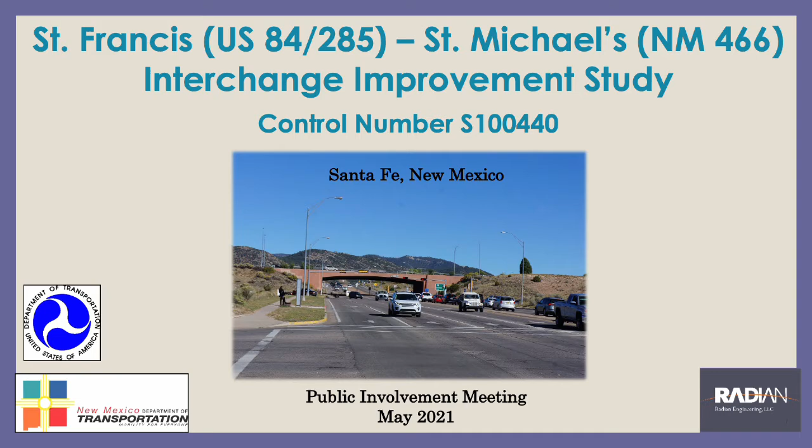Hello, and welcome to this presentation for the St. Francis-St. Michael's Interchange Improvement Study, located in Santa Fe, New Mexico. My name is Carlos Padilla. I am the Consultant Project Manager for Radian Engineering, who has been hired by the New Mexico Department of Transportation to conduct the study. This presentation is part of the public involvement program being completed for the project.

During this presentation, we will discuss the following topics. We will begin with an overview of the NMDOT study team and briefly describe the study process that will be followed. We will review the purpose and need for the project and discuss two previously completed studies that relate to the St. Francis-St. Michael's interchange and describe how the current study will build upon those earlier efforts. We will provide an overview of the study area under consideration and discuss a number of existing conditions and key project issues to be evaluated under the current study.

Next, we will review the findings of the Phase A study, which included a screening of the initial alternatives that were identified as potential improvement concepts for the project and recommended the most favorable alternatives to be advanced for further evaluation under the current study. Our team's environmental lead will discuss the environmental investigations and analysis that will be completed as part of the study, and he will provide information as to how you as members of the public can provide your input on the project and the alternatives under consideration. We will conclude the presentation with the next steps for the project development process and the time frame for completion of the Phase B study.

Our study team is being led by the New Mexico Department of Transportation. Mr. Javier Martinez, Assistant District Engineer, will be representing the District 5 office. Mr. Esteban Gonzalez is the Project Development Engineer from the North Region Design Office, and Ms. Jennifer Mullins is representing the department's Environmental Bureau. Radian Engineering will lead the consultant team on this project. My name is Carlos Padilla. I am the Consultant Project Manager.

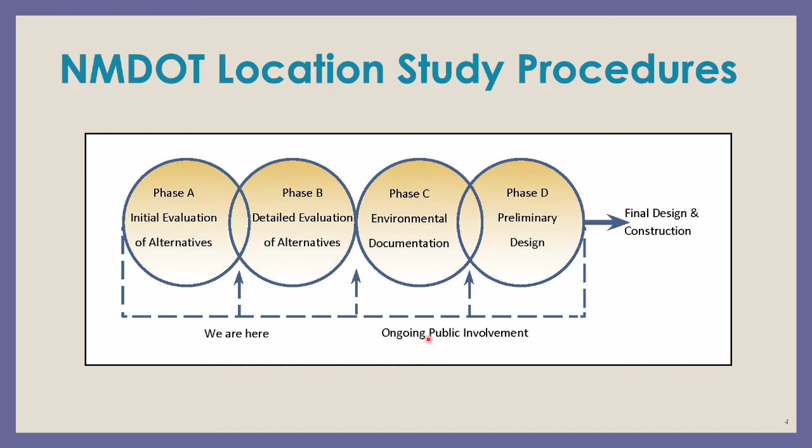The study process will follow the NMDOT location study procedures, which utilizes a phased approach to project development. We are currently in the study phase of the project. Tonight's presentation will primarily focus on analysis completed as part of the initial evaluation of alternatives and describe how that earlier work will be incorporated into the current Phase B study. Receiving public input on the work being undertaken throughout the study is an important part of the study process. The stated purpose and need for the St. Francis-St. Michael's Interchange Improvement Project is to address physical, operational, and safety deficiencies and to enhance pedestrian and bicycle connectivity throughout the interchange area.

Transportation planning efforts for the St. Francis Drive corridor began 10 years ago with a 6-mile corridor study that began at Rabbit Road, south of Interstate 25, and ended at the New Mexico 599 interchange. The 2010 study identified improvements for the St. Francis-St. Michael's interchange as the #1 priority project for the corridor. The NMDOT completed a Phase A alternative study for the interchange in 2018. The study verified the need for action and included an analysis of needed improvements. A range of potential improvement alternatives were evaluated, and those alternatives found to be inferior or unfeasible were eliminated. The Phase B study will provide additional evaluation and analysis for the remaining alternatives and will provide opportunities for public participation in the study process. A preferred alternative for the project will be selected under the Phase B study.

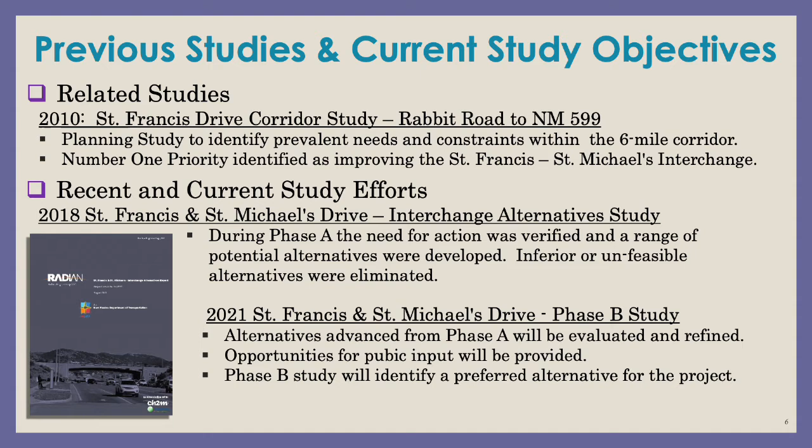St. Francis Drive, also known as US 84-285, is an important regional facility. It provides access from I-25 to the south to a number of communities located north of Santa Fe within the north-central part of the state. Both St. Francis Drive and St. Michael's Drive are important arterial roadways within the Santa Fe local transportation network.

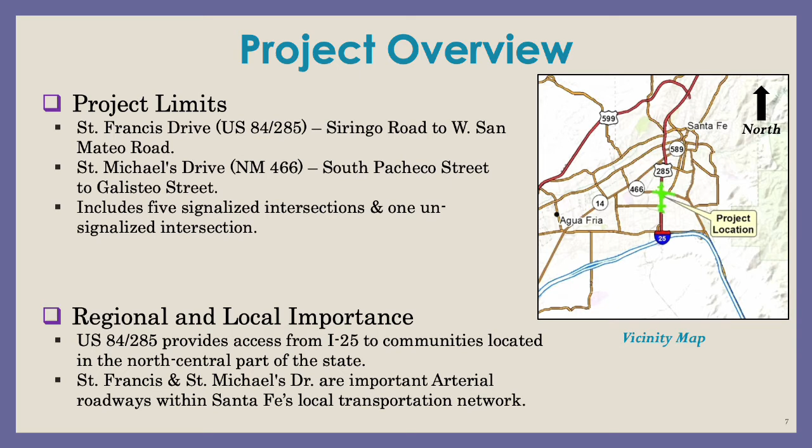Roadway features within the study area are as follows. Along St. Francis Drive, there are 3 11-foot lanes in each direction with no outside shoulders and a center median area. Along St. Michael's Drive, there are currently 6 lanes west of the southbound ramp intersection and 4 lanes east of the northbound off-ramp intersection. Within the core of the interchange, auxiliary lanes are added and dropped between ramps and intersections. The interchange is currently configured as a partial diamond on the west and as a partial clover leaf on the east.

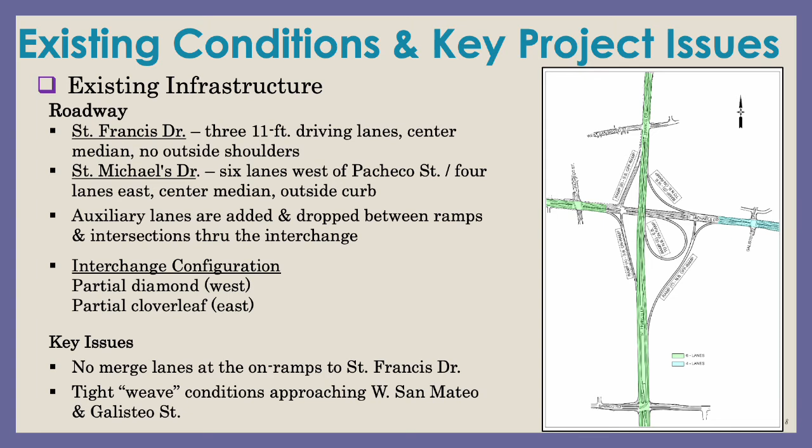Key issues include a lack of merge lanes at the 3 on-ramp locations and tight weave conditions as vehicles attempt to cross from the far outside right lane to turn left at the East Galisteo Street and West San Mateo Road intersections. The existing interchange bridge carries St. Francis Drive over St. Michael's Drive.

The bridge is 106 foot long by 92 foot wide with a 14-foot center median. The structure is comprised of a reinforced concrete box girder superstructure with full-height reinforced concrete abutments. There are a number of key issues to be considered under the current study. The existing bridge is now approaching 50 years in age. The existing bridge deck is too narrow to accommodate a merge lane from the northbound on-ramp.

A recent load rating analysis found the structure to be 43% under capacity. The bridge is classified as structurally deficient and functionally obsolete, and the structure type is not considered a good candidate for rehabilitation.

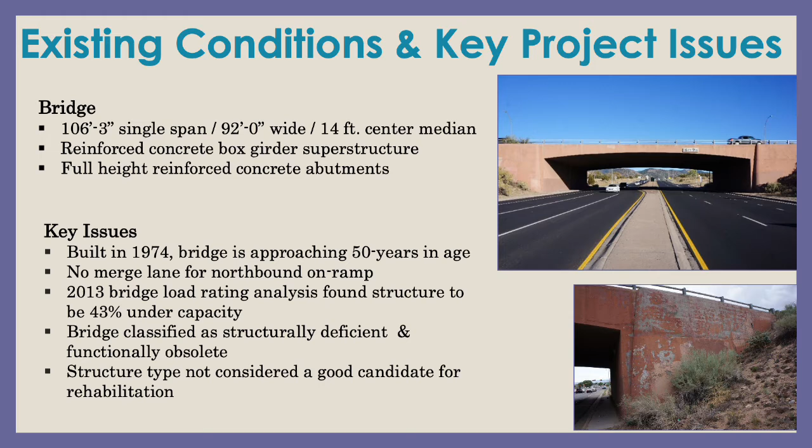Multimodal facilities. There are currently limited pedestrian and bicycle facilities within the study area. Pedestrian signals and crosswalks are found at some, but not all of the intersections. There is existing sidewalk along St. Francis Drive north of the project area and along St. Michael's Drive west of South Pacheco Street and east of Galisteo Street. There's a multi-use trail that runs along the east side of St. Francis Drive from Siringo Road to Galisteo Street that continues south and connects to the rail trail.

On-street bicycle lanes can be found on St. Michael's Drive east of Galisteo Street and at the cross-street intersections of Siringo Road and West San Mateo Road. There are 4 transit operators currently operating within the study area. They include the Santa Fe Trails bus service, the NMDOT shuttle service, the North Central Regional Transit District bus service, and the Rail Runner commuter train, which utilizes the Zia station located just south of the project area.

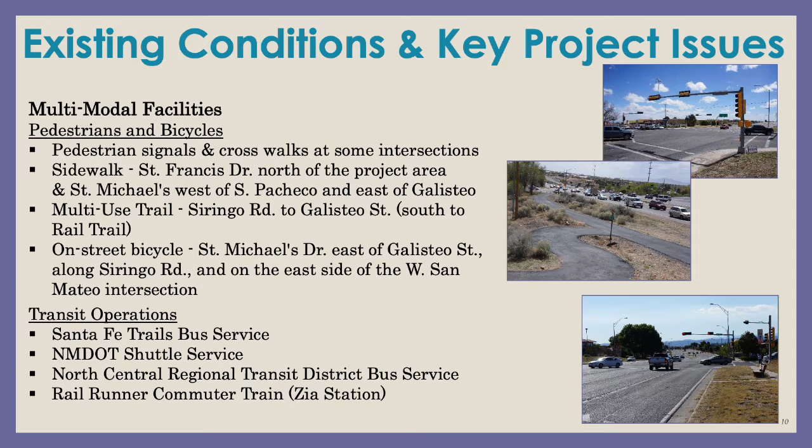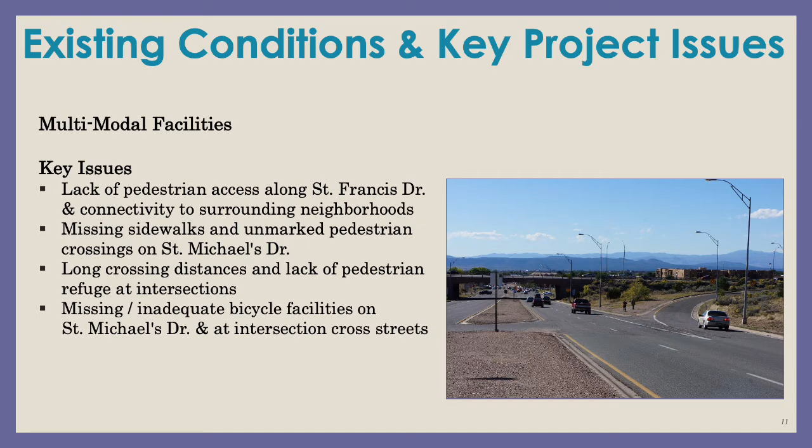Key multimodal issues to be considered under the study include a lack of pedestrian access along St. Francis Drive and connectivity to the surrounding neighborhoods, missing sidewalks and unmarked pedestrian crossings along St. Michael's Drive, long crossing distances and lack of pedestrian refuge at intersections, and missing or inadequate bicycle facilities on St. Michael's Drive and at intersection cross streets.

Traffic operations. Both St. Francis Drive and St. Michael's Drive are heavily traveled roadways. Currently, almost 45,000 vehicles per day travel along St. Francis Drive, and just over 26,000 vehicles per day travel along St. Michael's Drive. Peak hour traffic volumes at the 5 major intersections located within the study area are shown in the table. The morning peak hour occurs between 7:30 and 8:30 a.m., and the evening peak hour occurs between 4:45 and 5:45 p.m. Existing traffic counts show that intersection traffic volumes during the p.m. peak hour are slightly higher than those found during the a.m. peak hour.

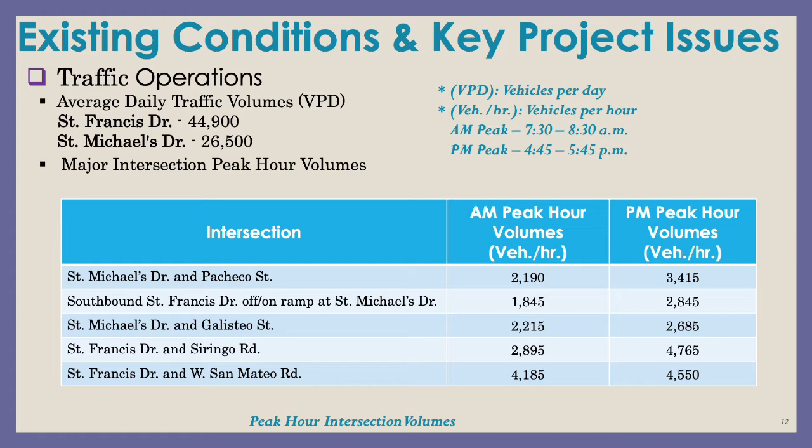Traffic operations analysis shows that all intersections currently operate without excessive delay during the a.m. peak hour, as measured by an overall level of service rating of D or better on a grading scale of A to F. However, some turn lanes at the Siringo Road and West San Mateo Road intersections lack sufficient vehicle storage, causing turning vehicles to spill over into the through lane and block the path of vehicles wishing to go straight. During the p.m. peak hour, the intersection level of service is also acceptable. However, slightly longer delays occur versus the a.m. peak hour. The Siringo Road intersection currently operates at a level of service D during the p.m. peak hour, and insufficient turn lane storage is found at all intersections.

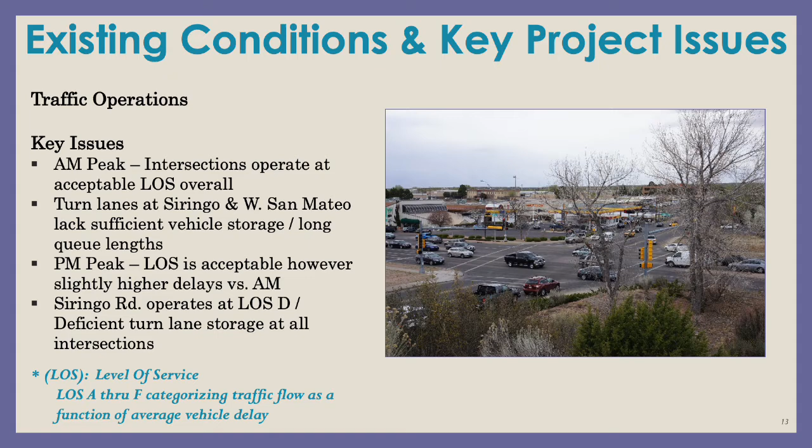Safety. A 3-year safety analysis was completed for the project. 222 total crashes were found to have occurred within the study area over the 3-year period. 82 of the crashes resulted in injury, and there were 3 pedestrian accidents, 1 resulting in a fatality. The study also identified several hotspot locations where clusters of accidents were found to have occurred within the study area. The hotspot locations were as follows.

At 2 of the on-ramp entrance locations from St. Michael's Drive onto St. Francis Drive where no merge lane exists. At the southbound on and off-ramp intersection on St. Michael's Drive. On St. Michael's Drive at the eastbound approach to the Galisteo Street intersection, and at all 4 of the outlying signalized intersections. The number and type of crashes found to have occurred at the on-ramps to St. Francis Drive were found to be directly attributable to the lack of available merge area at those locations. The figure to the right illustrates an accident cluster or hotspot at the southbound on-ramp entrance to St. Francis Drive.

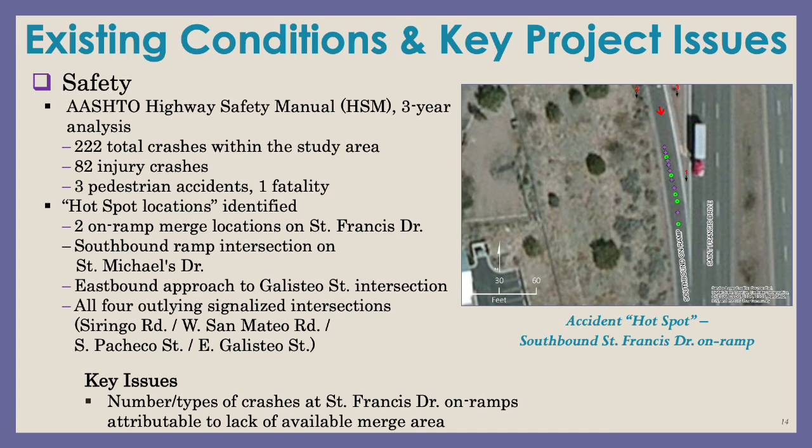We will now review the initial alternatives that were evaluated under the Phase A alternative study. 9 initial alternatives were identified. The alternatives can be grouped into 3 basic categories: 2 base alternatives, 2 at-grade intersection alternatives, and 5 interchange alternatives. The initial screening of these alternatives was based upon a comparative evaluation of how each alternative would address the underlying needs of the project. Performance criteria included addressing physical deficiencies, improving traffic operations, safety improvements, constructability and maintenance of traffic during construction, and estimated project cost.

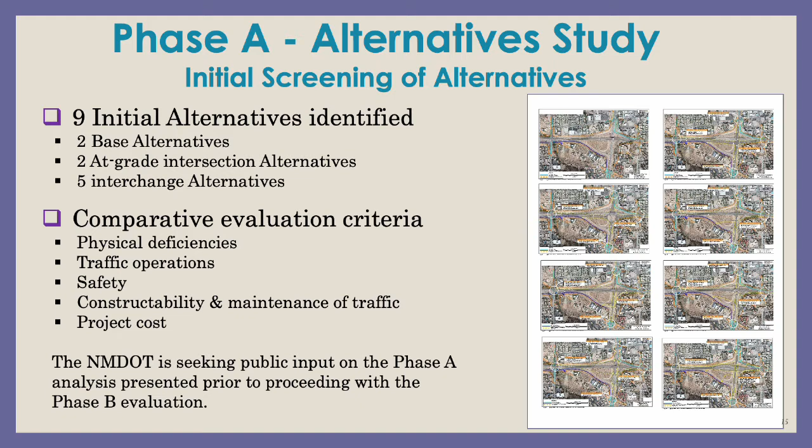A key objective of this presentation and public meeting is to obtain input from you, members of the public, on the information presented from the Phase A study prior to proceeding with the upcoming Phase B study. 2 base alternatives were considered under the Phase A study. The no-build alternative would include no improvements to the existing interchange and is maintained as a basis for comparison of

the other study alternatives. Prior to 2005, St. Francis Drive existed as a 4-lane roadway within the study area. It was restriped at that time to add an additional lane in either direction to accommodate increasing traffic volumes on St. Francis Drive. This action eliminated the outside shoulder areas and merge lanes at the 3 on-ramp entrances to St. Francis Drive.

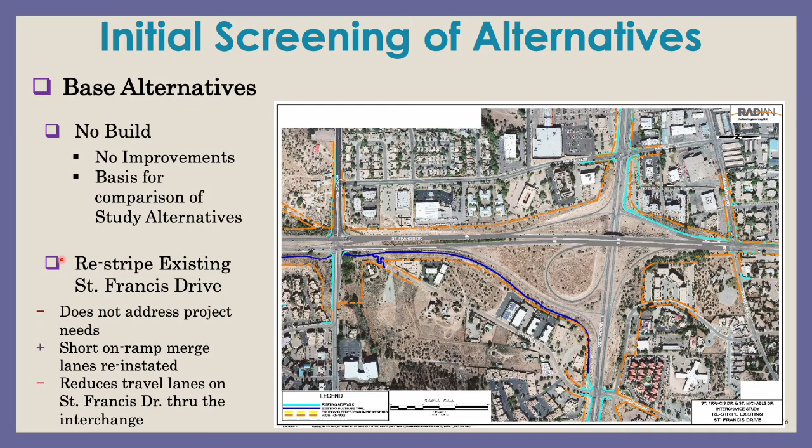Under the restripe existing St. Francis Drive alternative, the roadway would be returned to a 4-lane section, which would reestablish and improve the merge areas at the on-ramp entrances to St. Francis. This alternative would not address the project needs and would reduce the current number of travel lanes on St. Francis Drive through the interchange.

There were also 2 at-grade intersection alternatives evaluated under the study. Under the signalized intersection alternative, the existing bridge over St. Michael's Drive and all ramps within the interchange area would be removed and replaced with a single signalized at-grade intersection at St. Francis Drive and St. Michael's Drive. Under this alternative, improvements would also be made to the 4 existing outlying intersections.

The at-grade signalized intersection alternative would address the project needs, provide an at-grade alternative for comparison with the interchange alternatives, and would experience reduced impacts to traffic during construction versus several of the other alternatives. It would also have a lower project cost versus the interchange alternatives. This alternative would require a large multi-lane intersection in order to accommodate traffic passing through the intersection, and would carry with it several traffic operation and safety disadvantages as compared to some of the other alternatives.

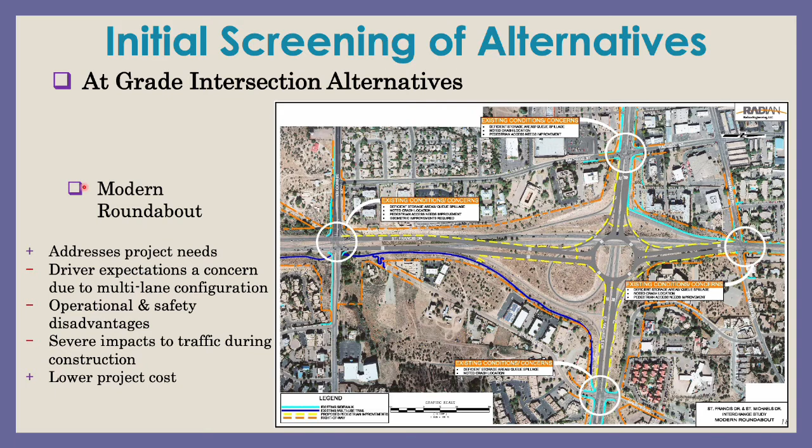Under the modern roundabout alternative, similar improvements would be made, but rather than building an at-grade signalized intersection, a modern roundabout would be constructed. This alternative would address the project needs and would have a lower project cost versus some of the other alternatives. However, it would present concerns over driver expectations in navigating through a large multi-lane roundabout, have a number of operational and safety disadvantages, and cause severe impacts to traffic during construction.

There were 5 interchange alternatives evaluated under the study. Under the diamond interchange alternative, the existing alignment along St. Francis Drive would be maintained and a new bridge built over St. Michael's Drive. The ramps on the west side of the interchange would be improved at their current location, while the ramps on the east side of the interchange would be removed and replaced with new ramps to form a diamond configuration. New auxiliary lanes would be built along southbound and northbound St. Francis Drive to accommodate traffic entering onto the main line from the new on-ramps.

All 4 of the existing outlying intersections would be improved under this alternative, as would be the case under all of the other interchange alternatives under consideration. The Diamond Interchange alternative would address the project needs and would provide for a greater range of potential benefits versus some of the other alternatives. Traffic impacts during construction would occur at an increased level versus some of the other alternatives, and the project would have a higher cost to construct.

Under the ramp reconfiguration alternative, the 2 existing on-ramps on the east side of the interchange would be removed and replaced with a single on-ramp from St. Michael's Drive. The existing northbound off-ramp and 2 ramps on the west side of the interchange would be improved at or near their current locations. New auxiliary lanes would be constructed along southbound and northbound St. Francis Drive to accommodate traffic entering onto the main line from the new on-ramps. This alternative would require a new and widened bridge over St. Michael's Drive.

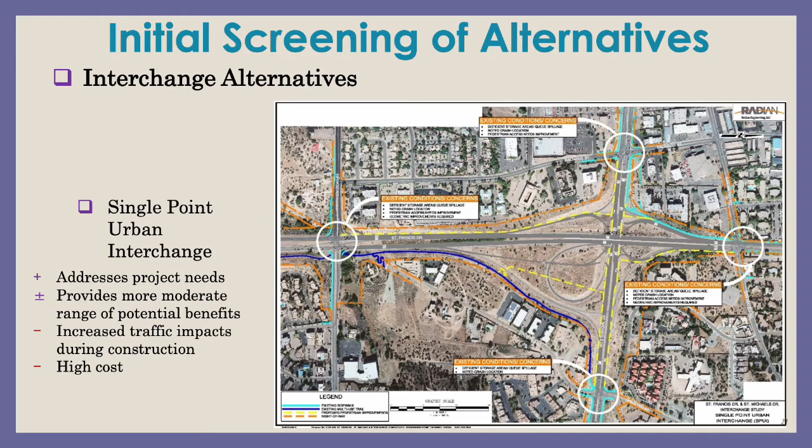Under the single-point urban interchange alternative, the entire interchange would be removed and reconstructed into a new configuration. The existing alignment of St. Francis Drive would be maintained and a new bridge over St. Michael's Drive would be constructed. The on-ramps would be reconfigured to form a single at-grade signalized intersection on St. Michael's Drive underneath the new bridge. New auxiliary lanes would be built along southbound and northbound St. Francis Drive to accommodate traffic entering onto the main line from the new on-ramps.

The single-point urban interchange alternative would address the project needs and would provide for a more moderate range of potential benefits versus some of the other alternatives. Increased levels of traffic impact would be experienced during construction, and the project would have a high cost to construct.

Under the diverging diamond interchange alternative, similar improvements would be made along St. Francis Drive, including a new bridge to be built over St. Michael's Drive. New auxiliary lanes would be built along southbound and northbound St. Francis Drive to accommodate traffic entering onto St. Francis from the new on-ramps. Along St. Michael's Drive, significant improvements would be made with non-traditional intersections being built to accommodate the new diverging diamond configuration, which eliminates left-hand turn movements at the intersections.

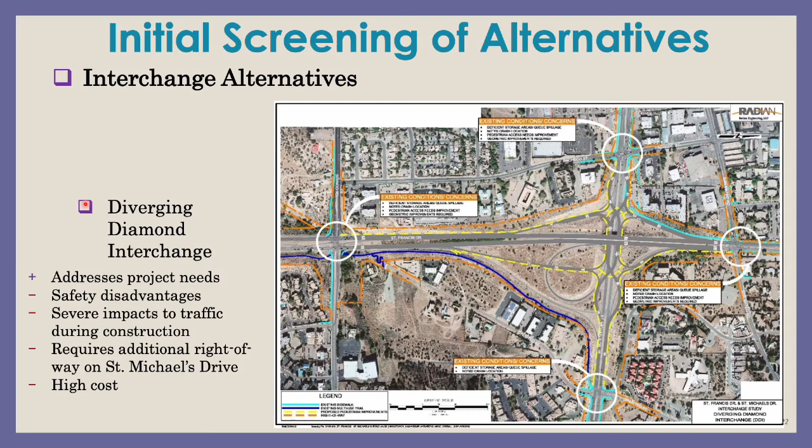The diverging diamond alternative would address the project needs, but would be expected to have several safety disadvantages as compared to some of the other alternatives. It would have severe impacts to traffic during construction and would require additional right-of-way on St. Michael's Drive, and would have a high project cost.

The final interchange alternative is the split bridge northbound-southbound left-on access alternative. Under this alternative, a portion of St. Francis Drive and the existing bridge over St. Michael's Drive would be removed and replaced with new northbound and southbound alignments on St. Francis Drive, leading to two twin new bridges to be built over St. Michael's. Under this alternative, the existing on-ramps on the west and east sides of the interchange would be removed.

Drivers wishing to access St. Francis Drive would do so from a new intersection on St. Michael's Drive located between the new bridges, and new on-ramps that would be built along the old roadway alignment. This would require vehicles entering onto St. Francis Drive to merge into the inside lane from the left-hand side. The existing southbound off-ramp would be reconstructed at its existing location, and a new northbound off-ramp would be constructed in the area of the old Cloverleaf ramp on the east side of the interchange.

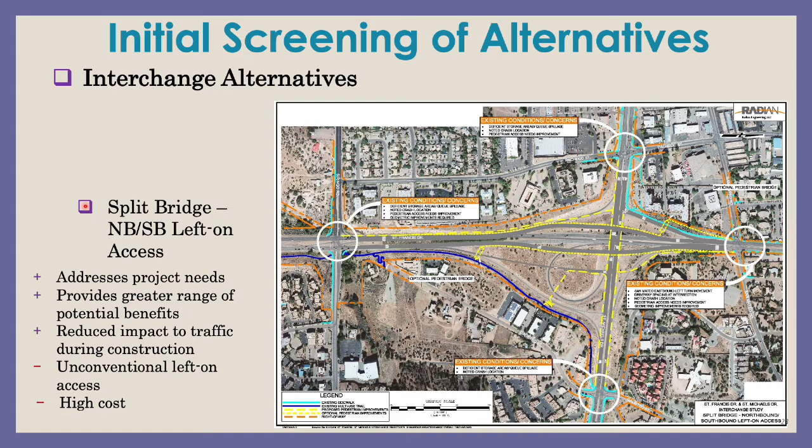The split bridge left-on access alternative would address the project needs and would provide for a greater range of potential benefits versus the other alternatives. Traffic impacts during construction would be substantially reduced as compared to the other alternatives. This alternative would utilize a non-conventional left-on access configuration under the final condition and would have a high project cost.

Through the Phase A screening analysis, the alternatives with the greatest potential for meeting the needs of the project were identified. Inferior or unfeasible alternatives were eliminated from further consideration. The alternatives eliminated from further study include restripe existing St. Francis Drive, the modern roundabout, the single-point urban interchange, and the diverging diamond interchange. Although the no-build alternative would not meet the needs of the project, it remains under consideration as a basis for comparison with the build alternatives.

In addition to the no-build alternative, the following alternatives will be advanced for further evaluation under the Phase B study: the at-grade signalized intersection, the diamond interchange, the ramp reconfiguration interchange, and the split bridge northbound-southbound left-on access interchange.

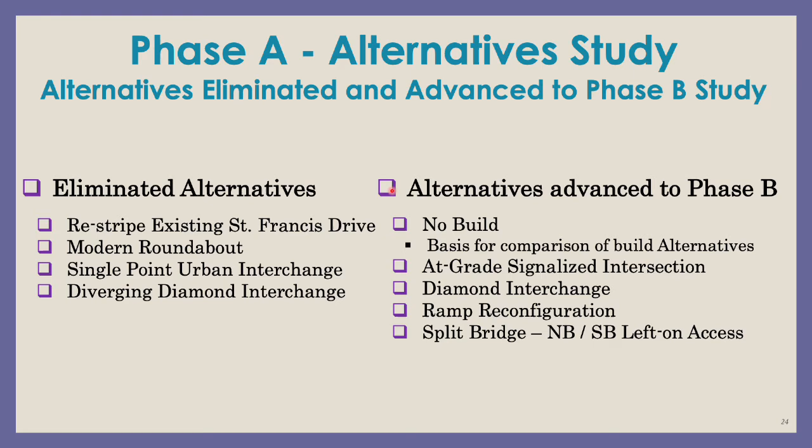Some of the issues that we expect will be key for the St. Francis-St. Michael's interchange include traffic noise in the adjacent residential neighborhoods, including possible mitigation measures such as noise walls, visual effects, and possible opportunities for aesthetic enhancements, and improved multimodal connectivity, including bicycle, pedestrian, and transit facilities. An important part of the NEPA process is public involvement, which is what we are beginning with this presentation.

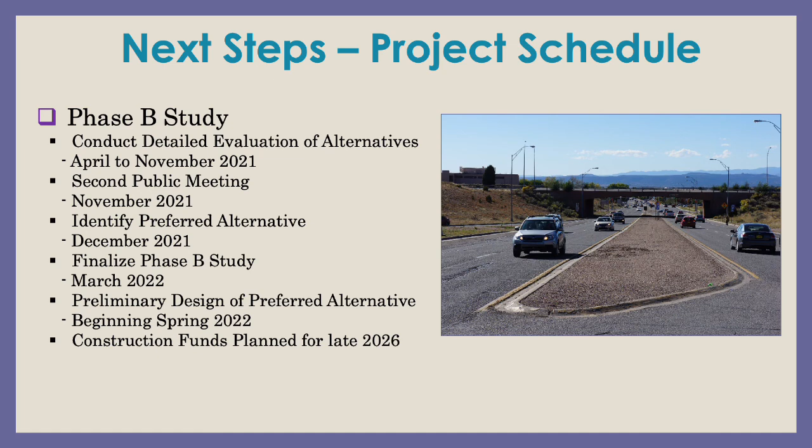The following are a few of the key milestones to be expected on this project. The Phase B detailed evaluation of alternatives will take place between April and November of this year. A second public meeting will be held in November to discuss the findings of the study. We anticipate that a preferred alternative for the project will be selected at the end of this year, and that the Phase B study will be completed by March of 2022. At that point, the project will enter into the preliminary design phase. Construction funds for the project are currently anticipated to be available in late 2026.